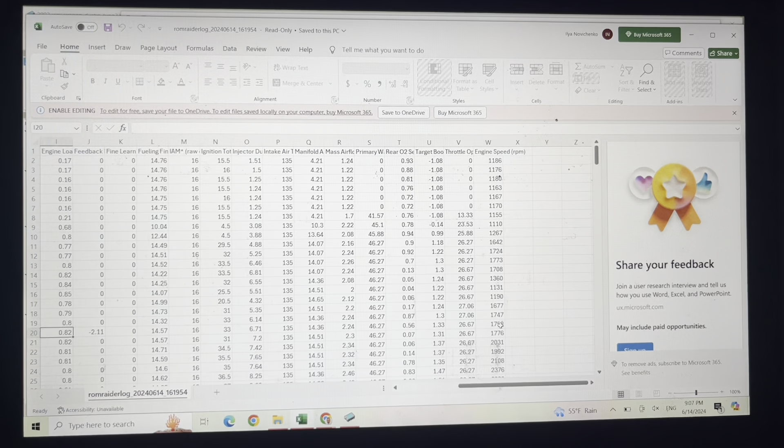The load for the engine was pretty low, 0.8. And if we scroll all the way to the right, it was just at around 1700 RPM. Could be phantom knock, just happening for whatever reason. At this point, the fueling wasn't necessarily right where we want it, but again, could be during some kind of

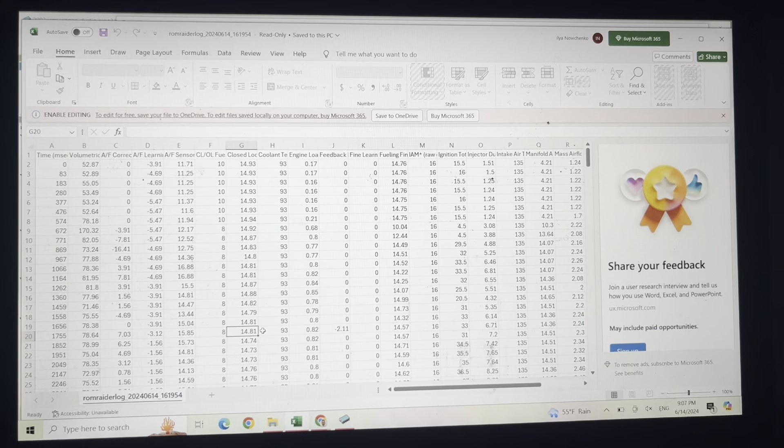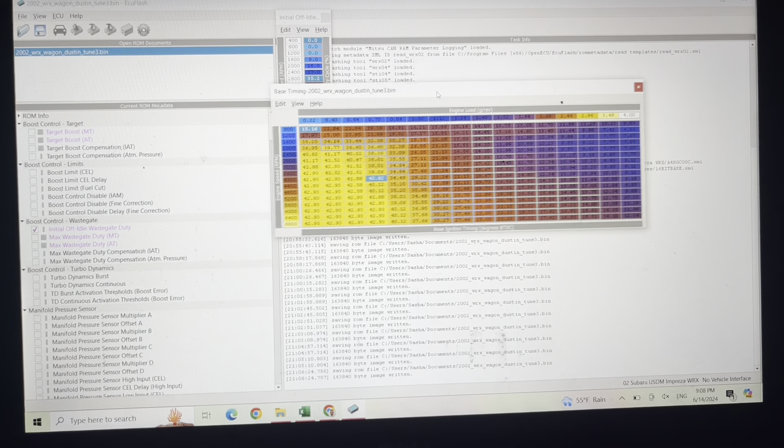odd driving condition. Usually my go-to is check the map at this area where it's 0.8 load and around 1700 RPM. Let me go find that. And you can see I've already been editing this table. So for example, 0.8 is this column, 1700 RPM is around here.

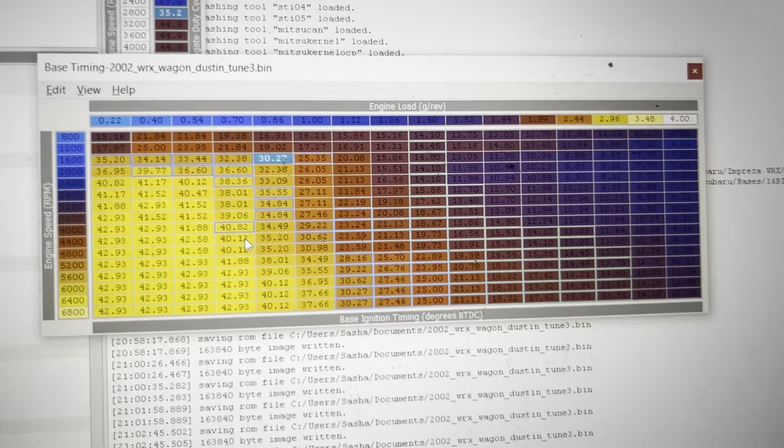Around this spot in the map, it's a little bit jumpy with the timing. And I don't know, I think this is inherited from factory, but it's, I guess, not the greatest, because if you're coming from 1200 RPM to 1600, it's jumping from like 19 to 30 degrees, which is over a 10-degree

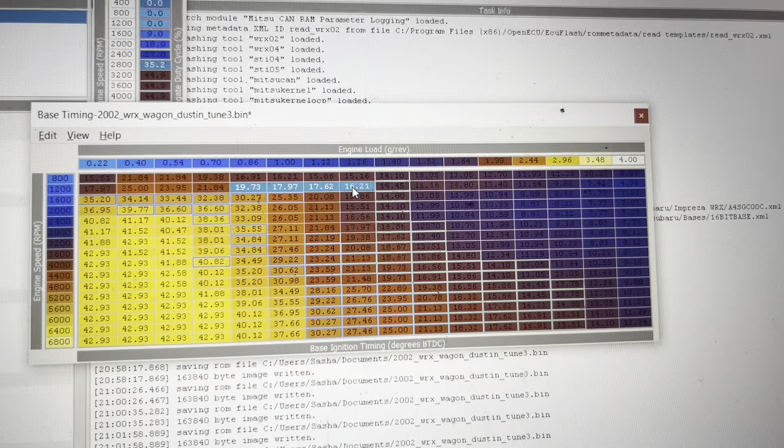diff. What I might do is slightly increase this, and it's interesting that I've noticed at times increasing timing will benefit the car in terms of knock, and the reason for that is that the car doesn't really like drastic transitions, and you want to smooth things out as much as possible, if that makes sense.

They did happen around, so I know some of these values, there were pretty big diffs in them previously, and so we'll see what we can do. Let me go back. It's the only knock condition I saw in this pull.

It's a little bit harder to read the boost pressure because it's using absolute, but let's see, this column V is for the throttle input. Let's see if there's a section where he gave us full throttle, and we can see, okay, so around here, full throttle from 3000 RPM.

He was hitting around 29, which is about 15 psi of boost, right around 15. It's a little bit below the desired, but again, if we navigate now to the left, probably with the increased temps in general and everything going on, we see -2 on the feedback knock.

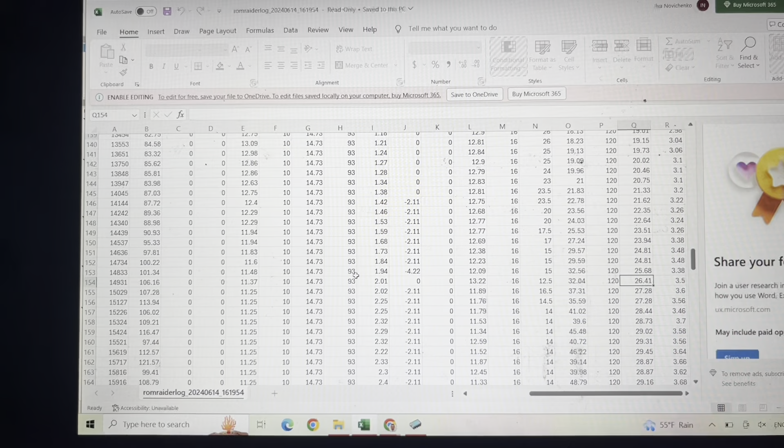-2 can sometimes be not ignored, but almost disregarded if you're going for a very aggressive tune. If you're seeing a little bit more than -2, then yeah, you should probably pay attention to what's going on there. For example, fueling wise, we were at 11.48, which is pretty good in terms of how rich we want it. We can see that the mixture is slowly getting enriched.

And so the load there was 1.9, and RPM wise, we were at 3,600. 1.9, 3,600. Let's go back to our ignition table. 3,600 is this row. 1.9 is around right here. So I've already adjusted this table.

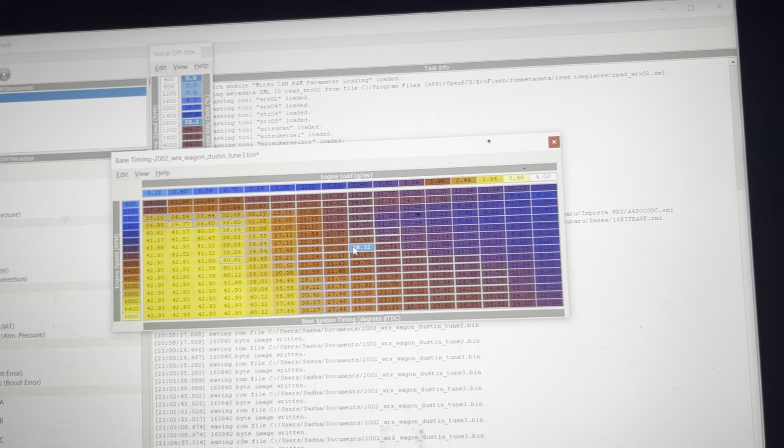I've actually pulled back a little timing in this area where you're kind of in boost. By the looks of it, usually I pull back like a half a degree or degree. It can help solve things. And then of course, if you see big dips and rises in the timing, you can always adjust for that. Make sure things are just as smooth as possible.

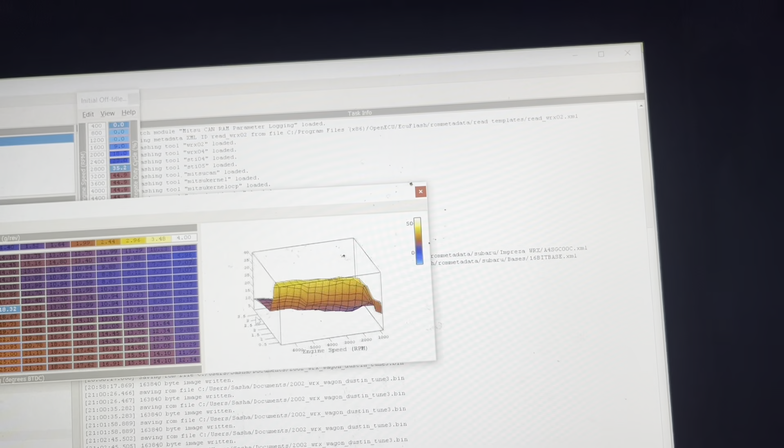Let's see if the 3D graph gives us any good idea. So as you might notice, when you're in very light load, that's where you have the more aggressive timing. And then as you come into boost, the timing definitely ramps down. And you want to make sure it's a fairly smooth map. It's probably a better description for map, because this is how your map for the ignition timing looks like.

Let me continue on with looking at this some more. I've adjusted fueling as well in some of these places, so that's something that I've been bearing in mind. Overall, it just seems to be pulling 2 degrees across the rev range up to like 4,000 RPM, and the load increases to about 2.5 at one point. If I go back here, 2.5 is about to this point.

And so, as I mentioned, I've already done this, but I've pulled back a little bit of timing. But you can do little iterations if you're tuning a car and want to pull back a bit, but not, let's say, considerably too much. In EcuFlash, the square bracket controls, I think, pull back like half a degree or less for the small adjustment. So you can play with that.

Again, some people think, well, I'm going to pull back timing and lose power. Well, your car is cutting back timing on its own. You should be tuning for the most aggressive, safe sort of timing for your car, because you want your car happy and running smoothly, and then build up from there. Let me see what else I can find, and I'll catch you guys again.

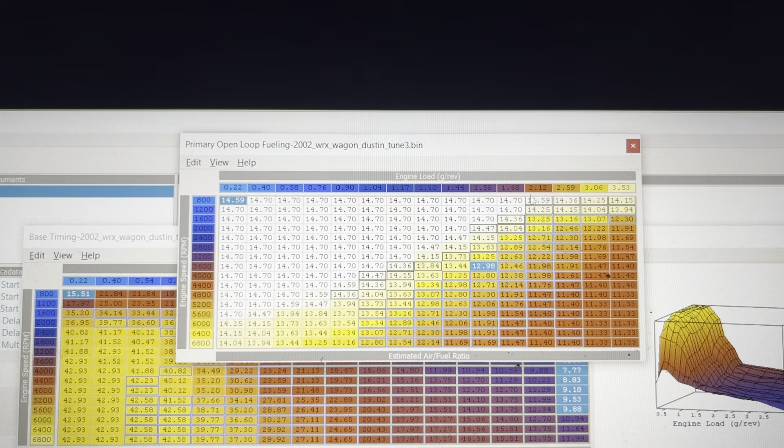And so in the tune, you'll see that I've, especially in the band where you come into boost, which is kind of this diagonal section, I've made sure that by the time we hit 2 load that we're plenty rich. Again, I like to do smooth transitions. Very quick drop-offs in fueling are not the best, again, for how the car takes it.

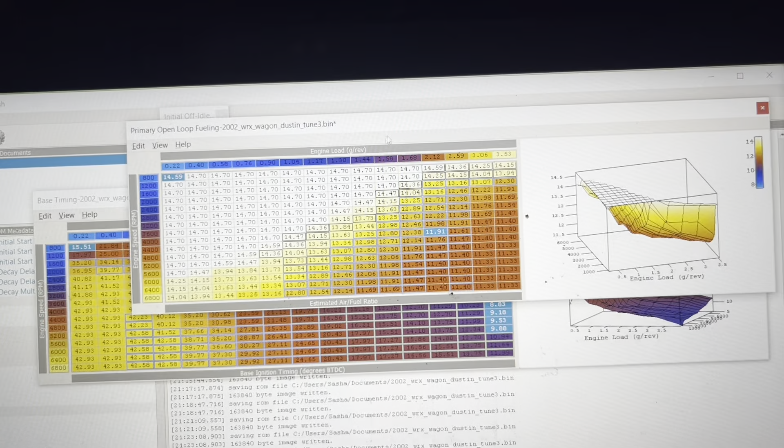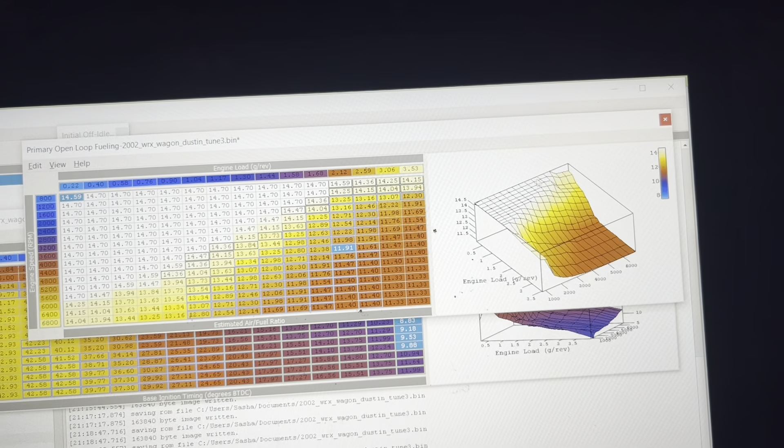So if we look at my 3D graph, let me spin it a little bit. Overall, you can see that the more load you get, the fuel mixture goes rich, aka kind of how you see it ramp down. And then of course 11.5 is this bottom area, 14.7 is this area where you're doing most of your very light driving, and then of course as you ramp up the load, you go into the enriched mixture. So that looks pretty good.

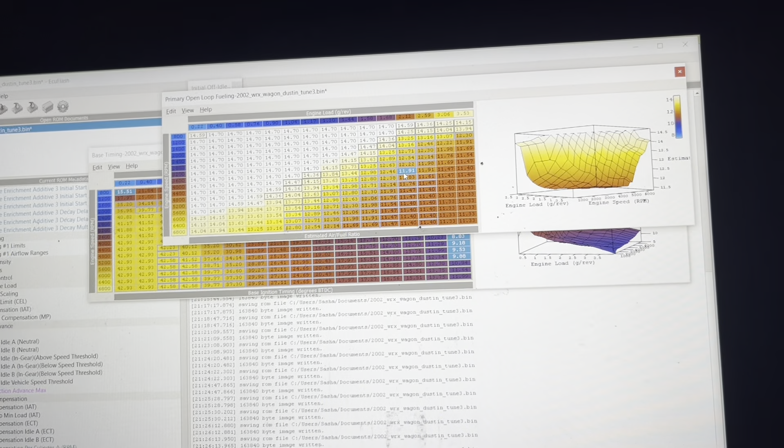I made sure to cover the area where they're at around 2 load, which is calculated in grams per revolution, that we're already below the 12s for air fuel ratio, and then of course enrich as the RPM band continues to around 11.5. 11.5 is pretty rich, but it's a safe mixture for the Subarus.

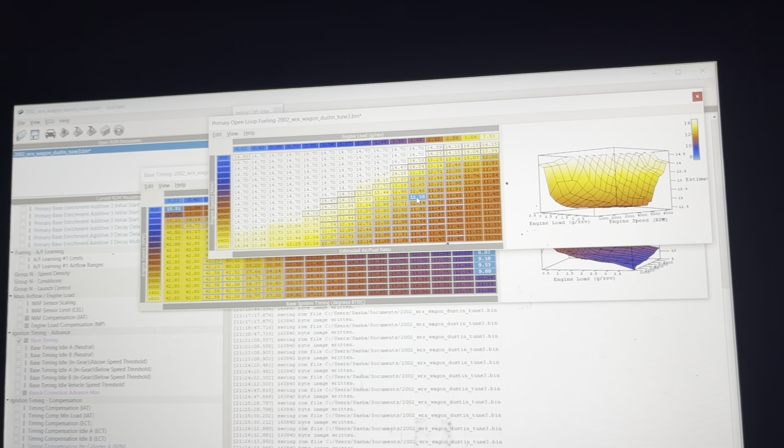Some other manufacturers on full load, they run actually slightly leaner mixture at full boost and full load, I think like 12 or near 12, but on the Subarus you want to be under 12 for sure. You want to be like 11.5 to make sure your car is happy and safe.

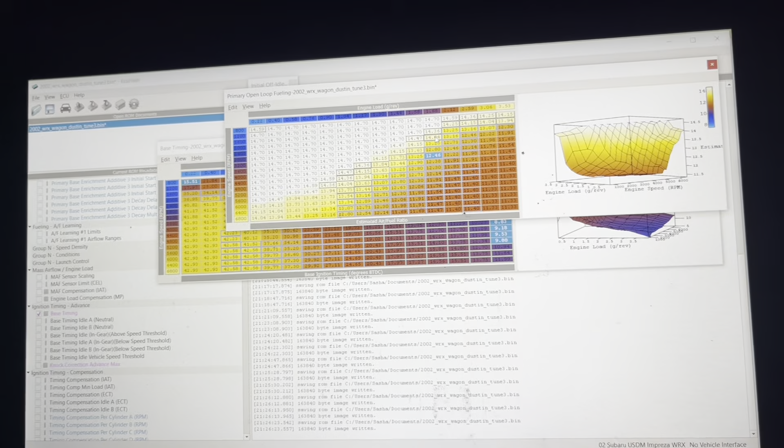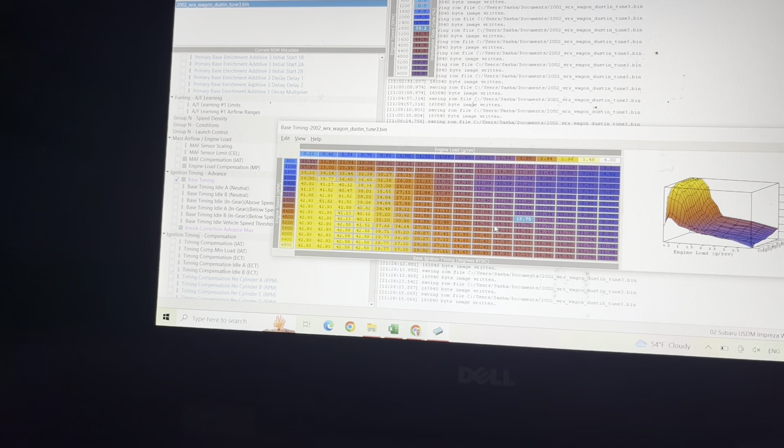But yeah, happy tuning everybody. EcuFlash and your Tactrix cable, and making little adjustments here and there. It's a lot of fun, and you just make sure to log your car, especially with larger changes in weather, to make sure she's still operating optimally. Take care.